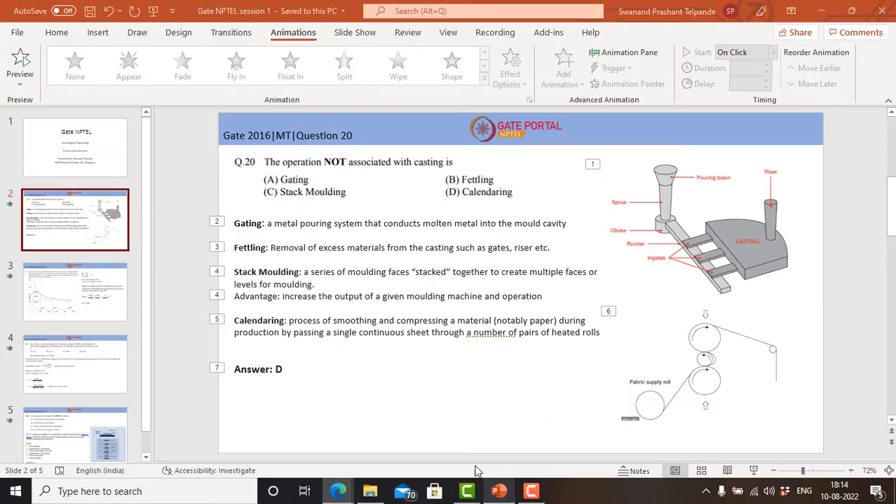Your voice is not audible. Oh, okay. Screen is visible correctly? Hello? Screen is visible? Hello? Is screen visible? Yes, sir. Okay. I will just shift my network to some other network. Just a second. Was I muted from start? Yes, sir. Oh, okay. I will start the session again. Sorry. Now I am audible, right? And my screen is also visible? Yes, sir. Okay.

So this session, let me introduce myself: I am Swanand Telpande. I am a PMRF research scholar from IISc Bangalore. I will conduct these GATE tutorial sessions, which will consist of previous year GATE questions and how we can solve these questions in limited time by understanding the science behind them. I will cover many topics which include physical metallurgy, mechanical metallurgy, solidification and casting, crystallography, characterization, etc.

So I will try to choose the questions which are related to a specific topic. In today's session I will cover one question of different topics. We will usually have 3 to 4 questions in one session, so that I can tell you how we can solve these questions, and you can also ask doubts regarding those questions. In today's lecture we will cover three basic fundamental questions.

This is the question asked in GATE Metallurgical Engineering 2016, question 20, which asks us the operation which is not associated with casting. Out of the 4 options, which is not associated with casting? The first one is gating, second is fettling, third is stack molding, and fourth is calendering. In order to answer this question, we should know all 4 operations.

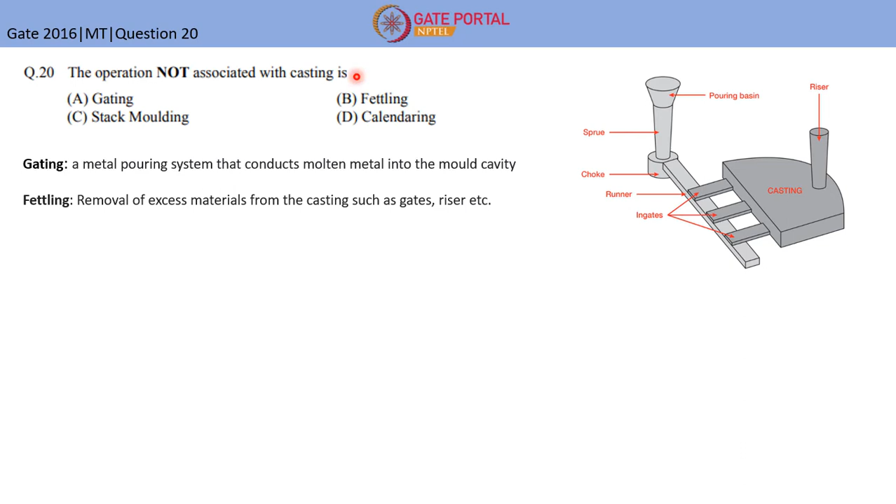So if molten metal rises from this riser, we are assured that all the parts of this casting are filled with molten metal. So gating is associated with casting. Second one is fettling. After this is solidified completely, we need to remove these parts from the casting, and this is our final product. Hence the process of removal of excess materials from casting such as gate, riser, etc. is known as fettling. So fettling is also associated with casting.

Now what is stack molding? Let's say I have this casting, and I bring more castings in series with this casting. So a series of molding faces stacked together to create multiple levels of molding. This is required in industrial application, because if you have one riser and a series of molds, then you are solidifying metal through one gate system.

And the advantage is the increase of output of a given molding machine, which is required in industry. Let's say I want to have 400 molds in a particular hour. So this is used in industry to increase the output. So stack molding is also associated with casting.

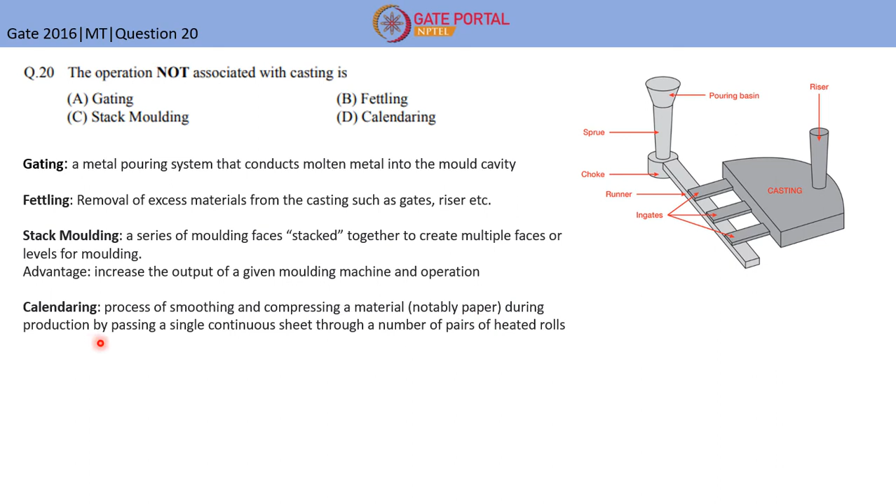And fourth one is calendering. So what is calendering? Calendering is basically a process of smoothing and compression of a material. It may be paper, some polymer or any other material, during production, by passing a single continuous sheet through a number of pairs of heated rolls.

So as you can see in the schematic, this is the thin sheet which is passed through a number of rollers, and the thickness of this sheet reduces with the pass of each roll, and this leads to smoothing and compressing of material. So this is calendering.

So this is not related to any of these processes which are associated with casting. So the answer of this question is D, calendering. So please let me know if you have any doubts in this question, then we will proceed to another question.

No, sir. No doubt. Okay.

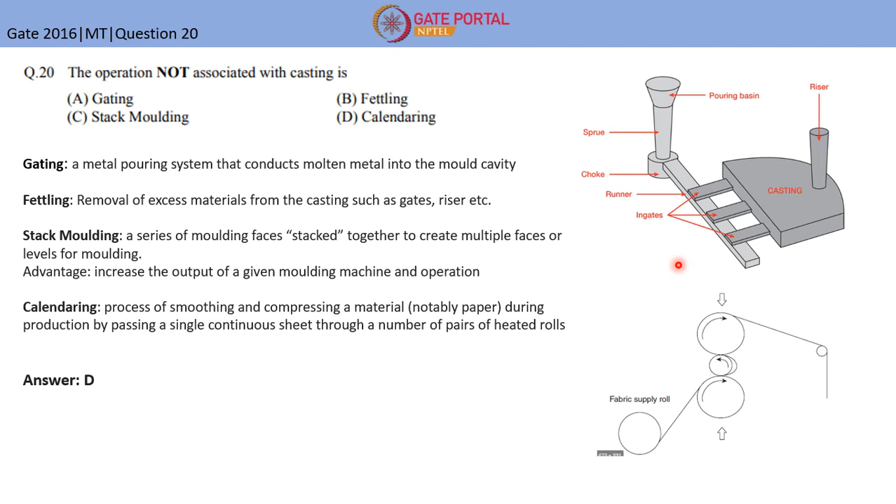So this is one type of question which is usually asked, like what are the processes or operations associated with XYZ process. So you should know what the steps are. Let's say this is casting, so many other processes would be there. So they will ask whether these steps are included in this type of process or not. So you should know what the processes are in a particular operation.

So coming to a mechanical metallurgy question. This is question 47 of GATE 2016 metallurgical engineering. Here the question asks us about the fatigue behavior of aluminium alloy.

Just a second. Is my screen visible? No, sir. Okay, just a second. Now is it visible? Yes, sir. Yeah, okay.

This is GATE 2016 MT question number 47, which states that the fatigue behavior of aluminium alloy is shown in the SN plot. A piston rod made of this material is subjected to two different cycles: first is 1000 cycles at 420 MPa, second one is 1000 cycles at 300 MPa. So we have to find, using Miner's rule of cumulative damage, the remaining fatigue life of the material at 250 MPa. So they have provided us with an SN curve which states, for a particular stress level, how many cycles there are before the material fails.

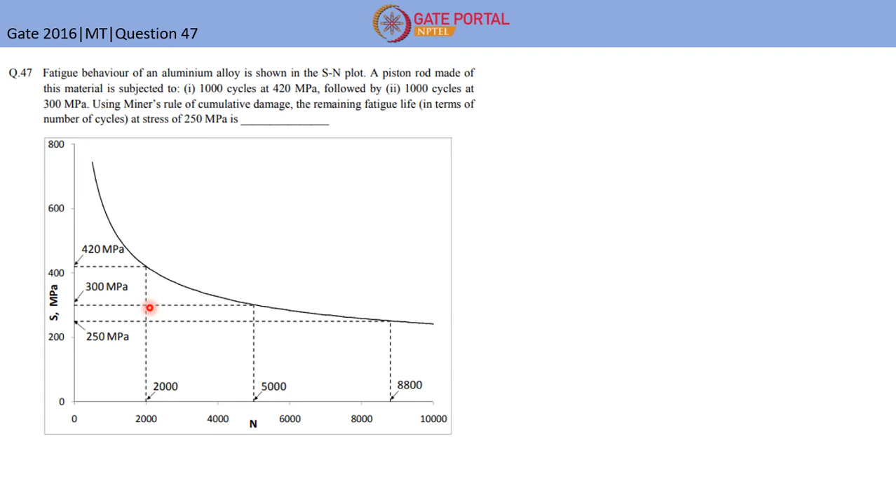So let's say for example 420 MPa. If we cycle the material at 420 MPa, the material will fail at 2000 cycles. Similarly, for 300 MPa, the material will fail at 5000 cycles, and for 250, it will fail at 8800 cycles. So we have to calculate using Miner's rule how many cycles it will take if for 420 MPa it has undergone 1000 cycles, and for 300 MPa it has gone again 1000 cycles. So the material is having some history of fatigue. Now we have to evaluate how many more cycles it can take.

So this is given by Miner's rule, which simply states that failure occurs when the summation of individual damage values caused by each rainflow cycle reaches a value of 1, where nj is the number of cycles at a particular stress, and capital Nj is the lifetime at that stress, which is given by 2000, 5000 and 8800. So we have to basically sum this, and this sum should total 1.

So here I have done that. So 1000 cycles at 420 MPa divided by the lifetime of that material at that particular stress level, plus 1000 cycles at 300 MPa divided by the lifetime at 300 MPa, which is 5000 cycles, plus let's consider x number of cycles it will sustain before it fails eventually, divided by the lifetime at 250 MPa. So if we sum this, it should be equal to 1, which Miner's rule states.

So if we calculate, x comes out to be 2640 cycles. So the material will take 2640 cycles before it will fail eventually. So this is how the question can be answered. Do you have any questions on this question? Doubts? Is this question clear? Any doubts regarding what fatigue is and everything? You can ask any question regarding this question, or if you want to have some science behind it, like how this curve is generated. Any question you can ask me.

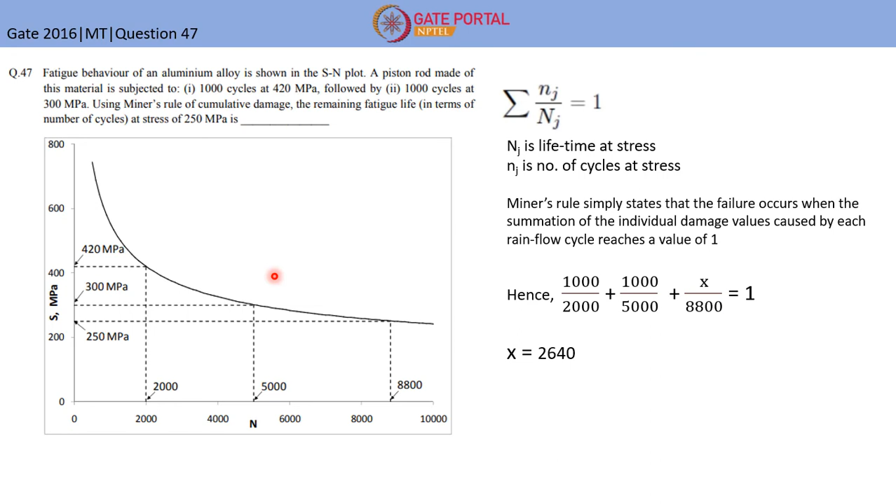If not, let's proceed to some other question. Again, I have taken from the same GATE 2016 metallurgical engineering, question 53, which states that for casting a cylindrical aluminum bloom having a length of 1000 mm and diameter of 750 mm, the approximate solidification time in minutes estimated using Chvorinov's rule is: 45 minutes, 316 minutes, 440 minutes and 620 minutes, and they have given the mold constant to be 2 seconds per mm square.

Now we have to find out how much time it will take using this rule for this aluminium bloom to get solidified. They have given dimensions of the bloom as well as the mold constant. So firstly we should know what is Chvorinov's rule. Chvorinov's rule of solidification suggests that the section of casting having a large volume to surface area will take a long time to solidify.

So let's consider that you have a block and the heat extraction from that block is happening because of the surface area, right? The energy or heat stored in the volume will be transferred to the surface and from surface to the mold. This is how the heat extraction will take place. So more the surface area, it will take less time to solidify, or in other case large volume to surface area will take more time to solidify.

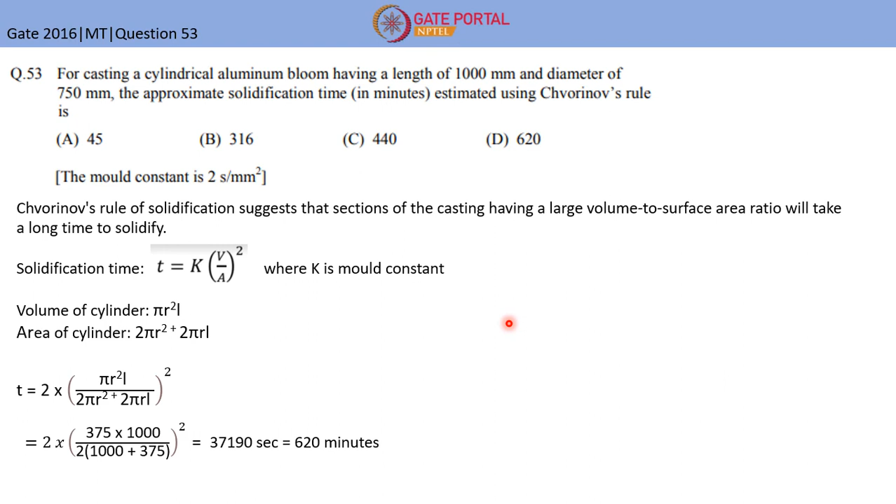So first, let us understand what the dye penetrant test is. Dye penetrant test is a widely used non-destructive method to detect surface defects. Why surface defects? Because we apply a liquid dye on the surface, this dye penetrates into the surface defects, and we remove the excess material, which I will tell you in the further steps, and we are able to predict where the defect lies on the surface.

So this is basically a non-destructive method based on capillary action. By capillary action I mean the fluid will directly penetrate into the defect, and you can easily find out where the defect lies using ultraviolet light. When we put ultraviolet light over the surface, this dye will reflect a different color, and you will be able to predict that the crack is present on the surface.

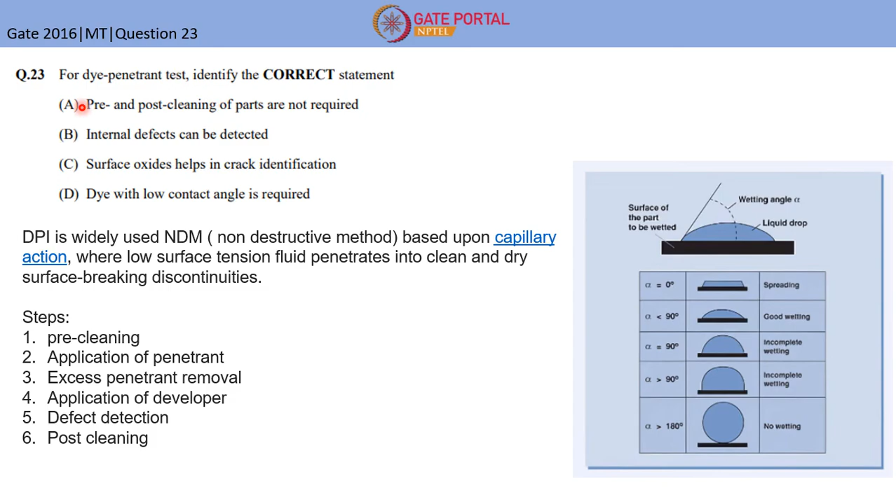So now again coming to the options, option A, pre and post cleaning of parts are not required, which is not correct. It is a mandatory process in the dye penetrant test, so this is incorrect. Internal defects can be detected, which is wrong, because the dye can only go to the defects which are readily accessible, and internal defects cannot be accessed.

C, surface oxides help in crack identification, which is false. If the surface is having oxide, the dye cannot penetrate the crack, and we are not able to identify the crack which is beneath the surface oxide. And D, dye with low contact angle is required, which is true. So here the answer is option D. Okay.

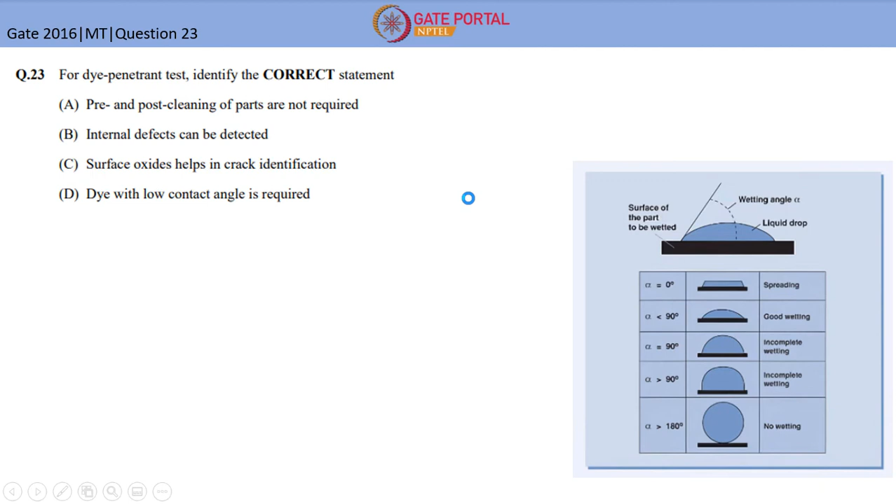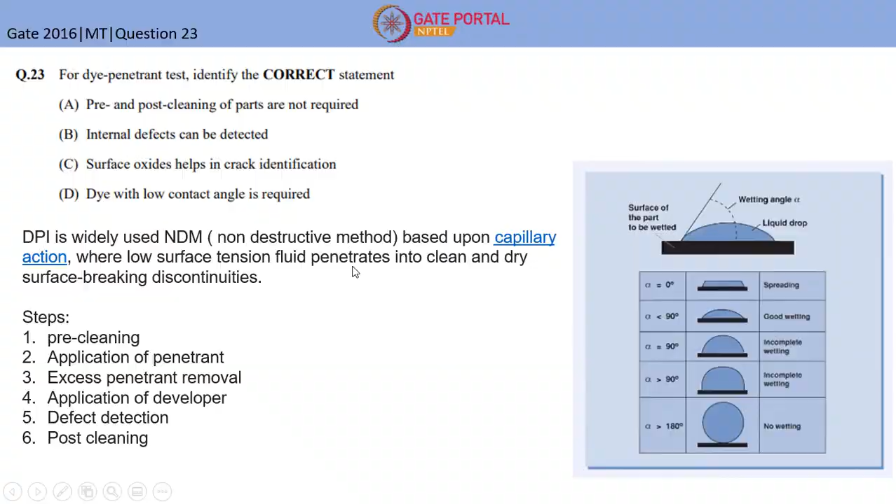Hello. Yes, sir. Again my screen got hanged, is it? Yes, sir. Okay. Now you are able to see? Yes, sir. Just a second, some issue is there. Some issue is there with PowerPoint. Till what point was I there? Sir, the full question number 23 was completed. It was over, right? Yes, sir. Okay.